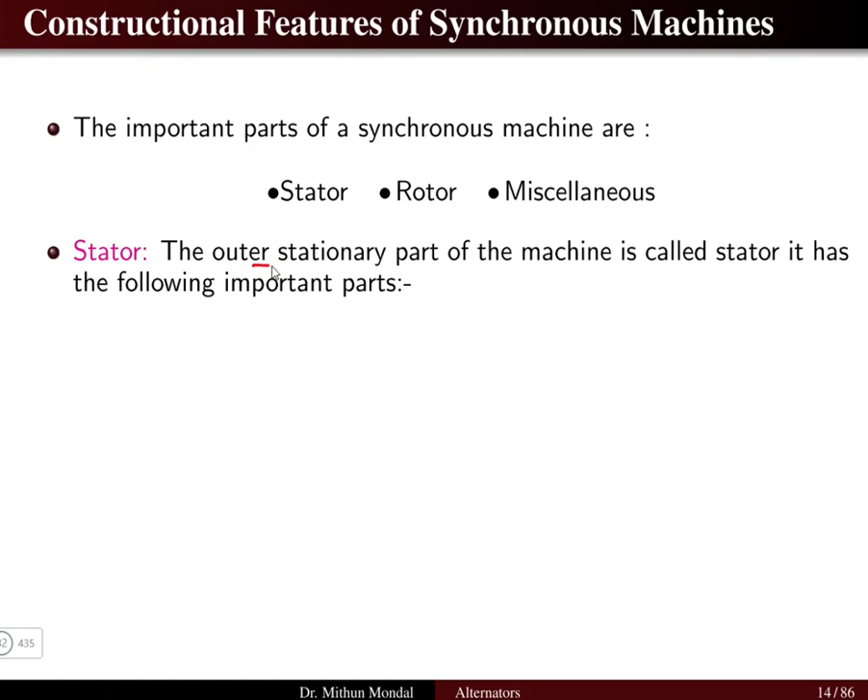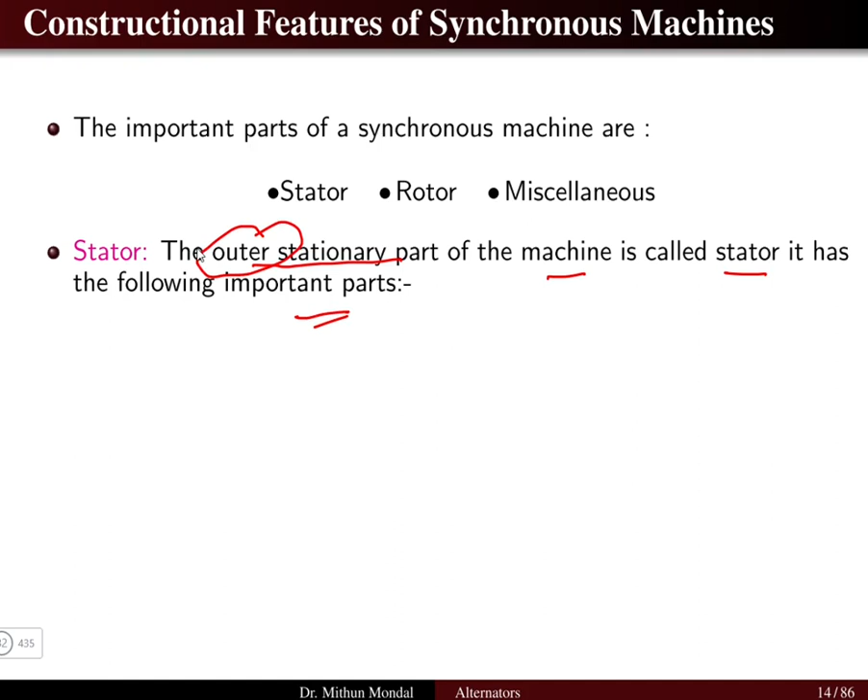What is a stator? Stator is basically the outer stationary part of the machine, and has the following important parts. It is the outer part of the machine. The stator has a frame, which is the outer body of the machine, made up of cast iron. The stator frame protects the inner part of the machine. It can also be made of any other strong material since it does not carry the magnetic field.

The stator frame is generally to protect the machine. So it has to be made from a strong material. It does not have to carry any magnetic field. Cast iron is used only because of its high mechanical strength. Since cast iron has more mechanical strength, the frame is made up of cast iron.

The second part is the stator core, which is made up of silicon steel, in the form of stampings which are insulated from each other. Its function is to provide an easy path for the magnetic lines of force and to accommodate the stator winding. The stator core is where the flux is produced. It is generally made of silicon steel stampings, properly insulated from each other. It provides an easy path for the flux and also carries the stator winding.

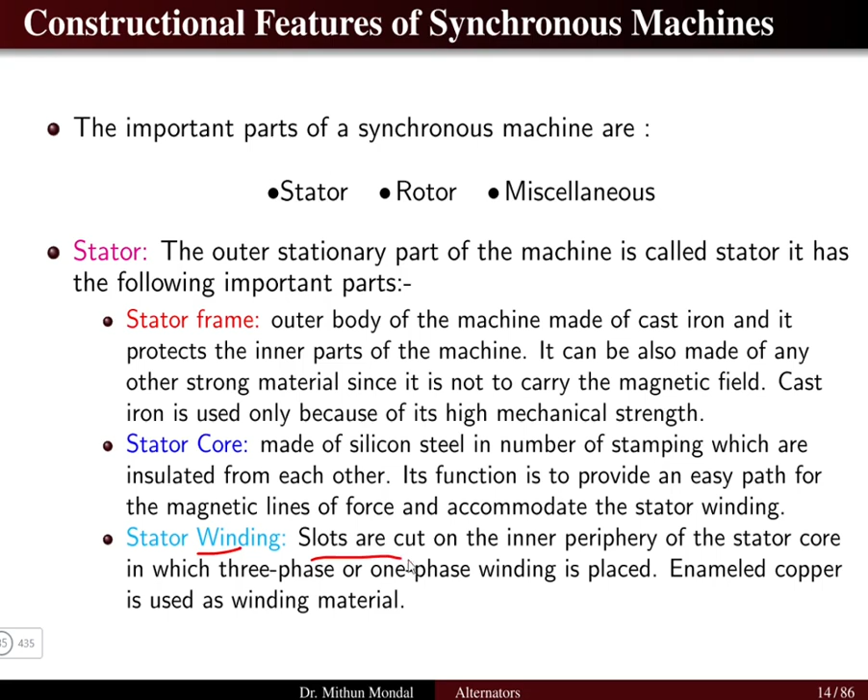The third important part of the stator is the stator winding. Basically, slots on the inner periphery of the stator core contain the three-phase or single-phase winding. Depending on this, we can form a three-phase synchronous machine or a single-phase synchronous machine. Enameled copper is used as the winding material, since copper is a good conductor of electricity. So we have covered the stator, which is the outermost periphery of the synchronous machine, having the frame, the core, and the winding as its important parts.

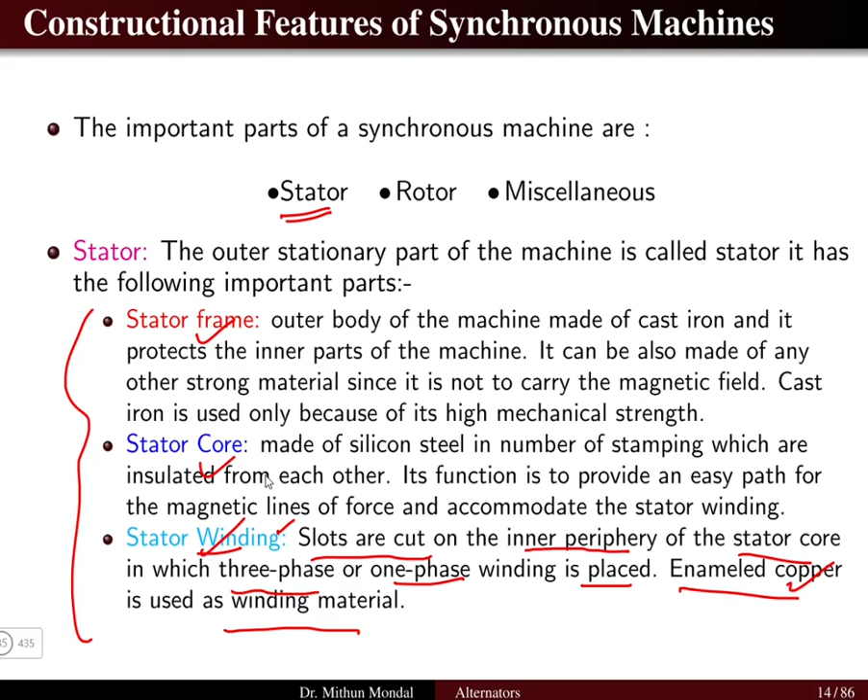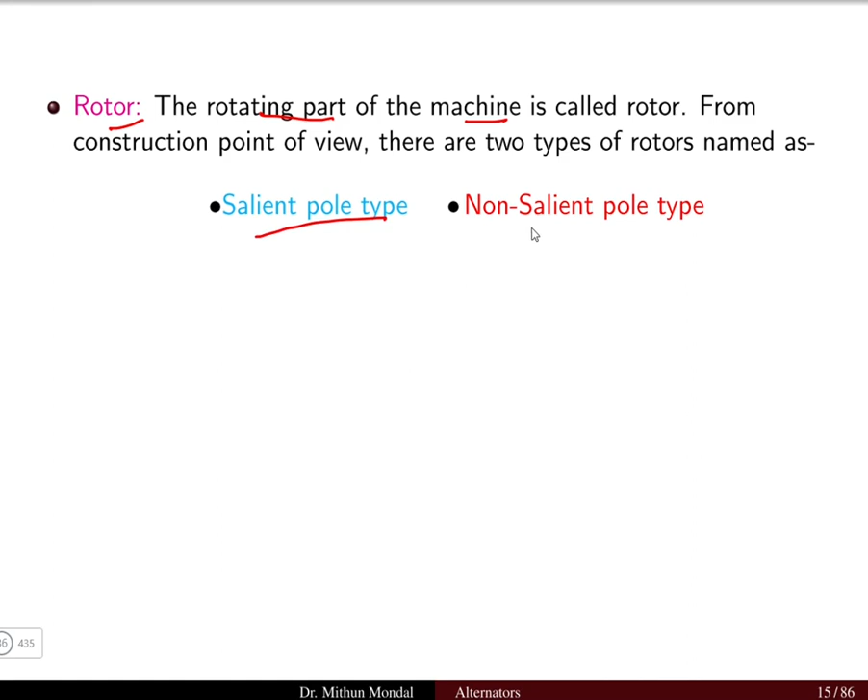The rotor is basically the rotating part of the machine. The stator is the stationary part and the rotor is the rotating part. The rotor can be of two different types: the salient pole type and the non-salient pole type. Salient pole means the pole which is projecting out. We will see the fundamentals of the salient pole type.

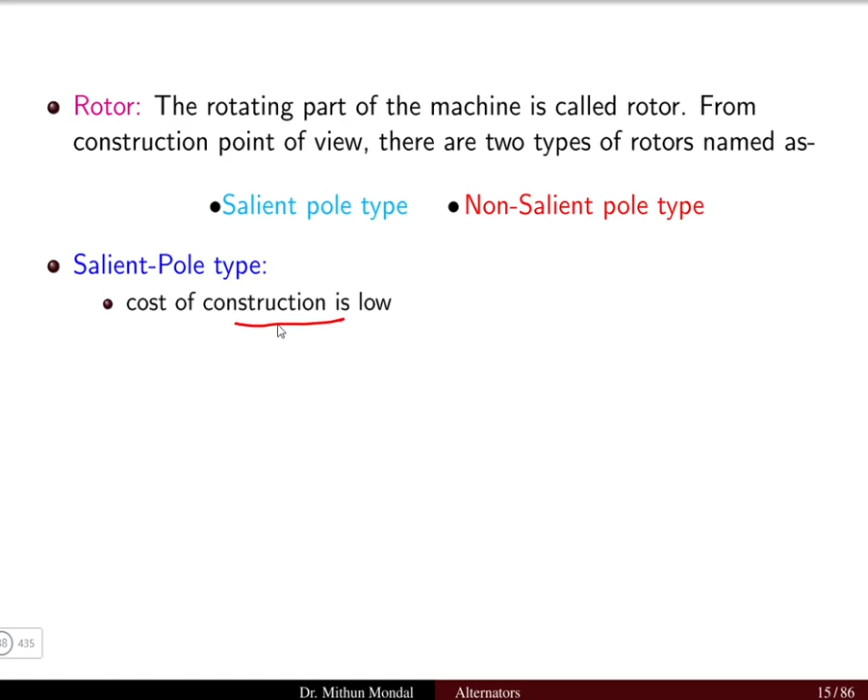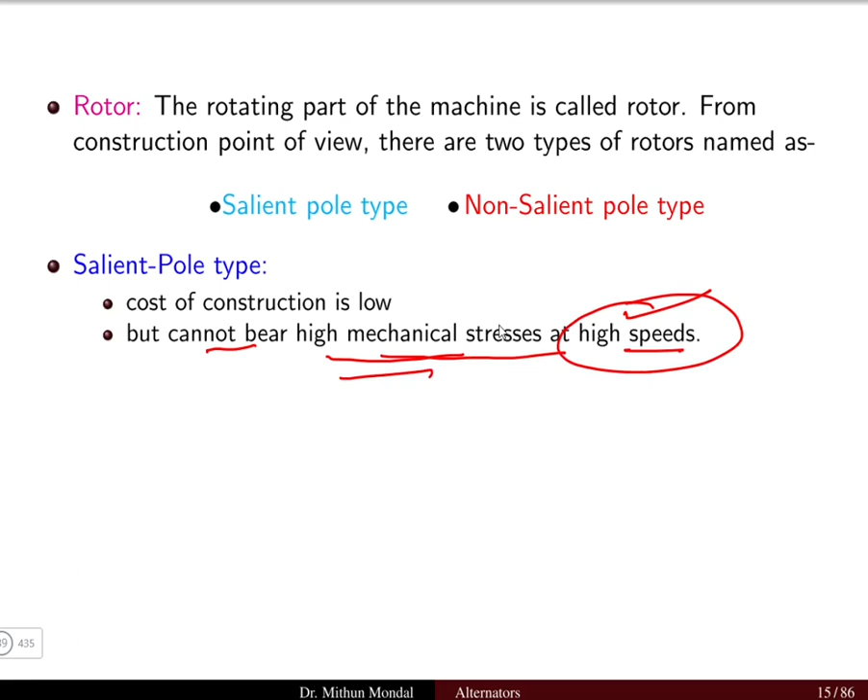Its construction cost is low, so the cost involved in constructing a salient pole type machine is low, but it cannot bear high mechanical stress at high speed. So when the synchronous machine is running at high speed, it will not be able to bear the high mechanical stress. That is the reason at high speed we go for the non-salient pole type.

Therefore the salient pole type is suited for medium and low speed and is usually employed at hydroelectric power stations and diesel power plants. When the synchronous machine has to run at medium or low speed, we prefer the salient pole type, and when it has to run at high speed, we go for the non-salient pole type, generally used in hydroelectric power plants and diesel power plants to produce electricity.

Now the important parts of the salient pole rotor are the spider, the pole core and pole shoe, the field winding or excitation winding, and the damper winding.

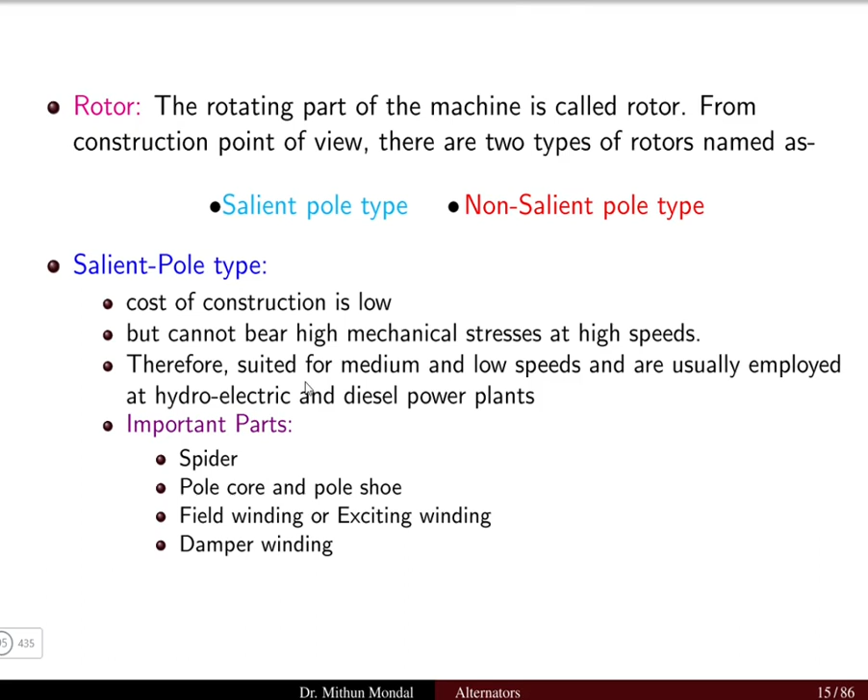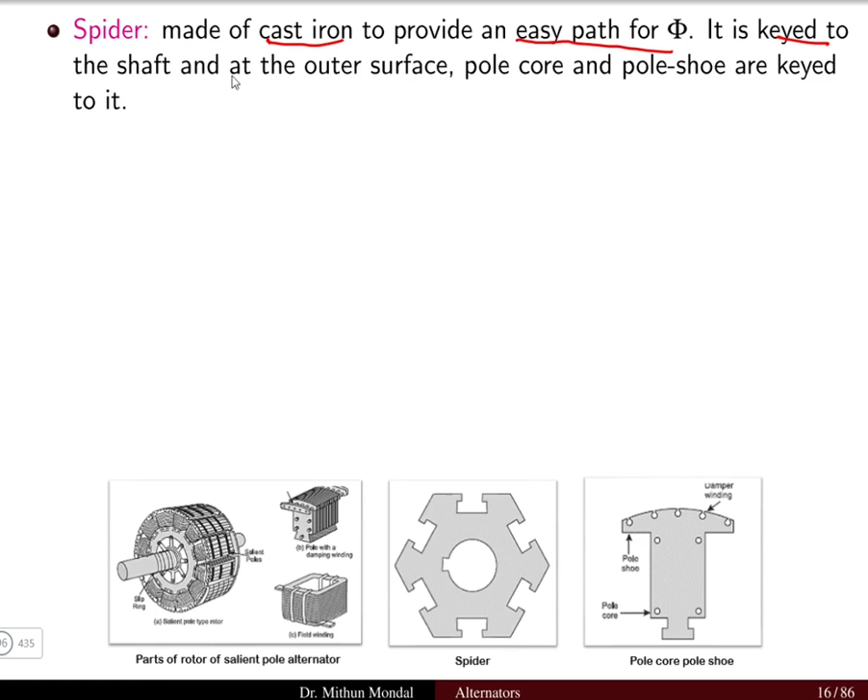What is a spider? The spider is made up of cast iron and provides an easy path for the flux. It is keyed to the shaft of the machine at the outer surface, and the pole core and pole shoe are keyed to it. Now, the pole core and pole shoe: the pole core provides the least reluctance path.

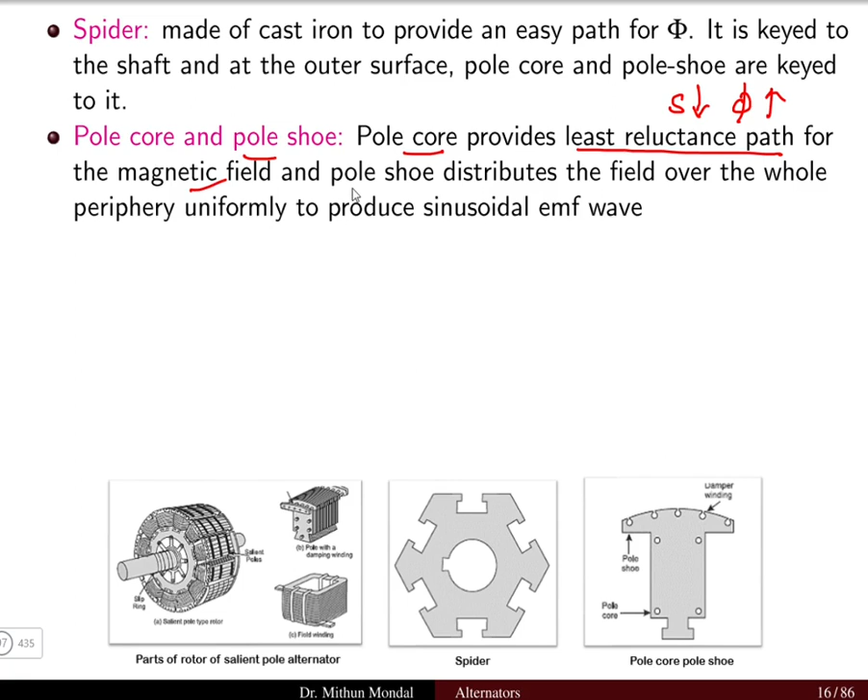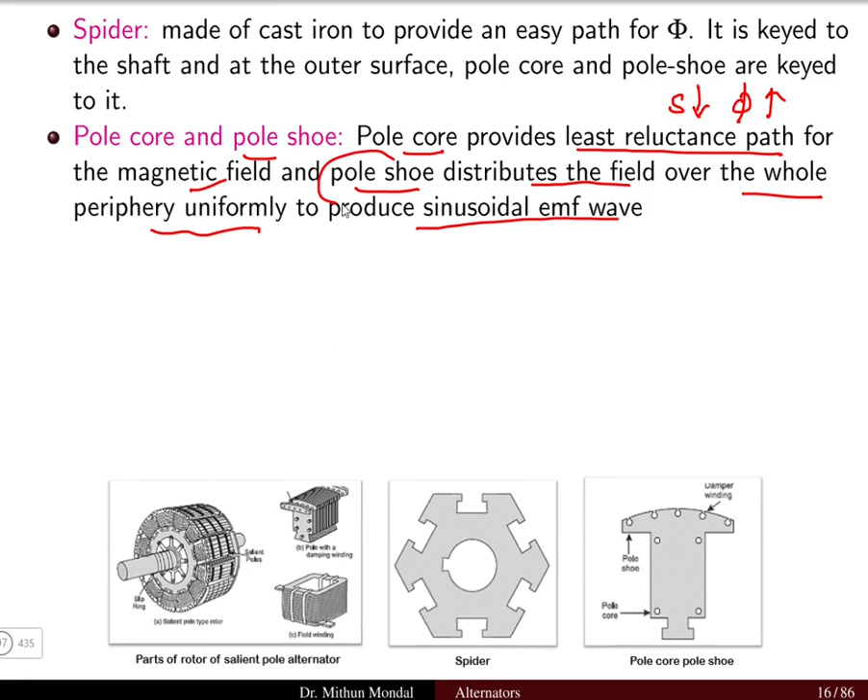If the reluctance is lower, it will be easy to establish the flux in the core of the transformer, the core of the magnetic path, that is the magnetic field. The pole shoe distributes the field over the whole periphery uniformly to produce a sinusoidal EMF wave. So the pole shoe is trying to produce a sinusoidal EMF wave.

The field winding or the excitation winding is wound on the former, which is the core, and then placed around the pole core. DC supply is given to it. So the excitation winding, which is the field winding, we will be giving a DC supply, which we have discussed in the previous lecture also. It will be around 125 to 600 volt DC supply, and this will be given through slip rings.

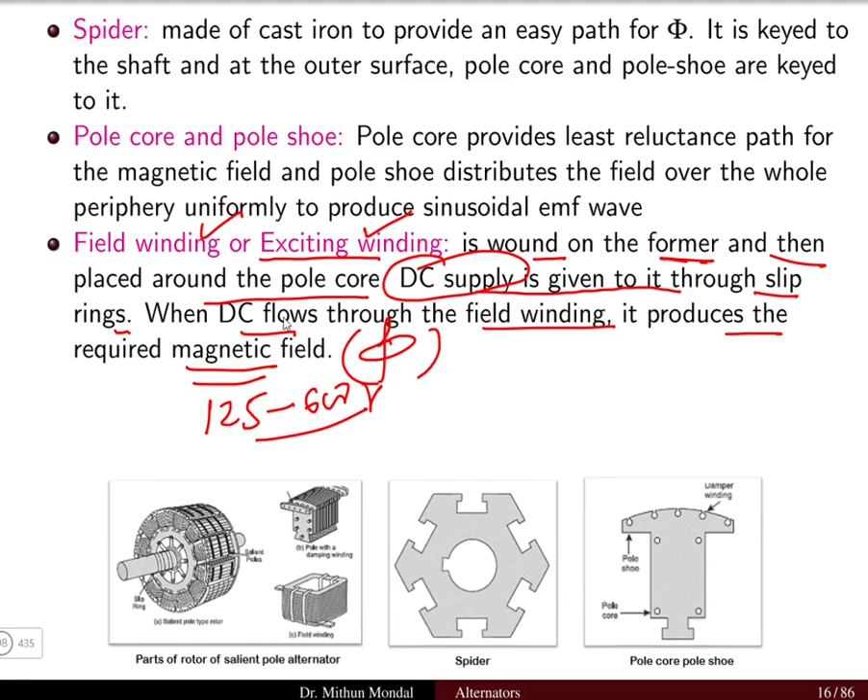So when DC flows through the field winding, it produces the required magnetic field. So we require to produce a flux in the field, that is through the field winding when a DC supply is passed through it.

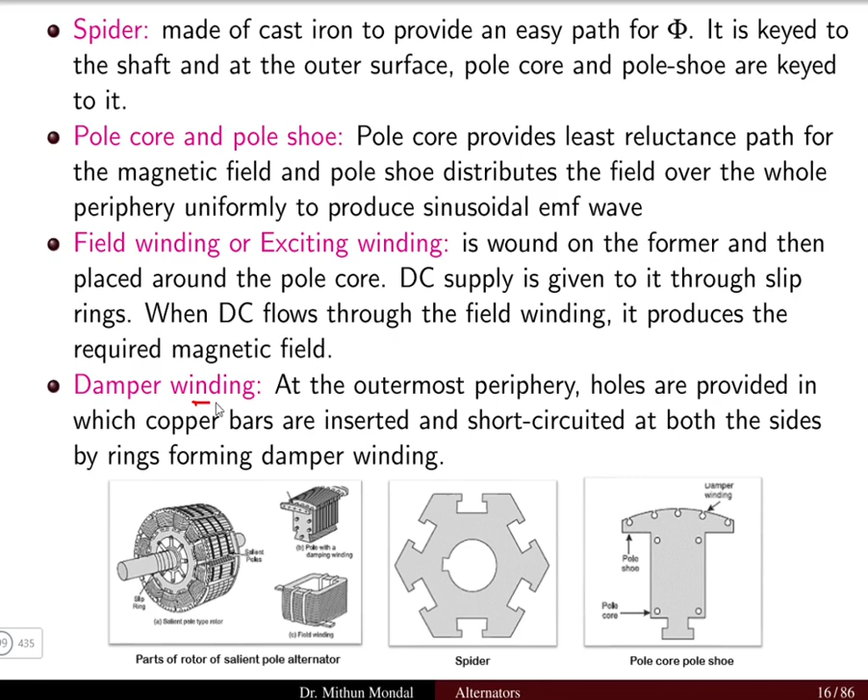Now, one important part of the rotor is basically the damper winding, which is at the outermost periphery, and holes are provided in which copper bars are inserted and short circuited at both the sides by a ring forming a damper winding. We will discuss damper winding in more detail in the coming lecture. So here, generally to understand the damper winding, we see in the pole shoe there will be holes produced, and these are basically copper bars that are inserted and short circuited. They form a ring which is known as the damper winding.

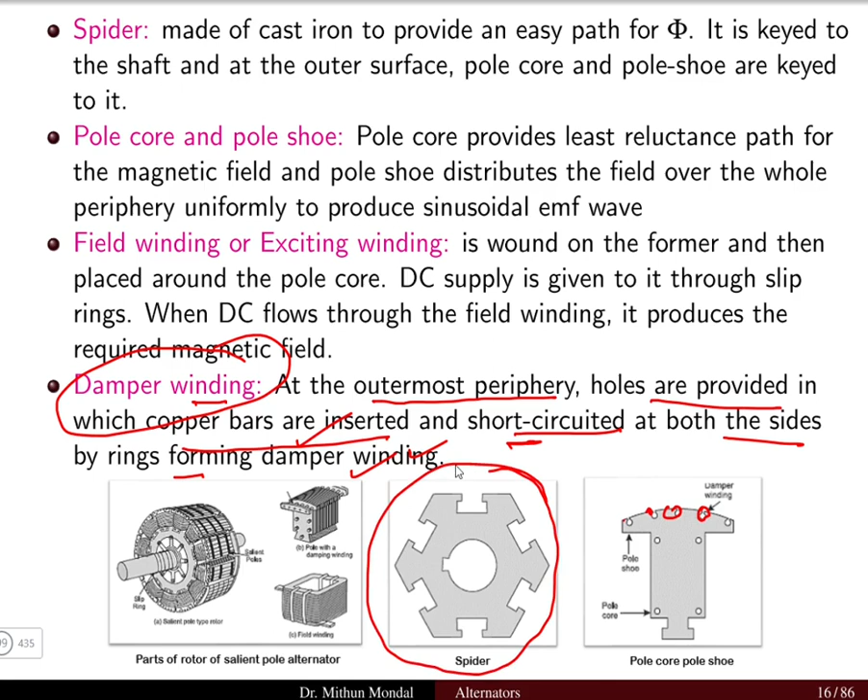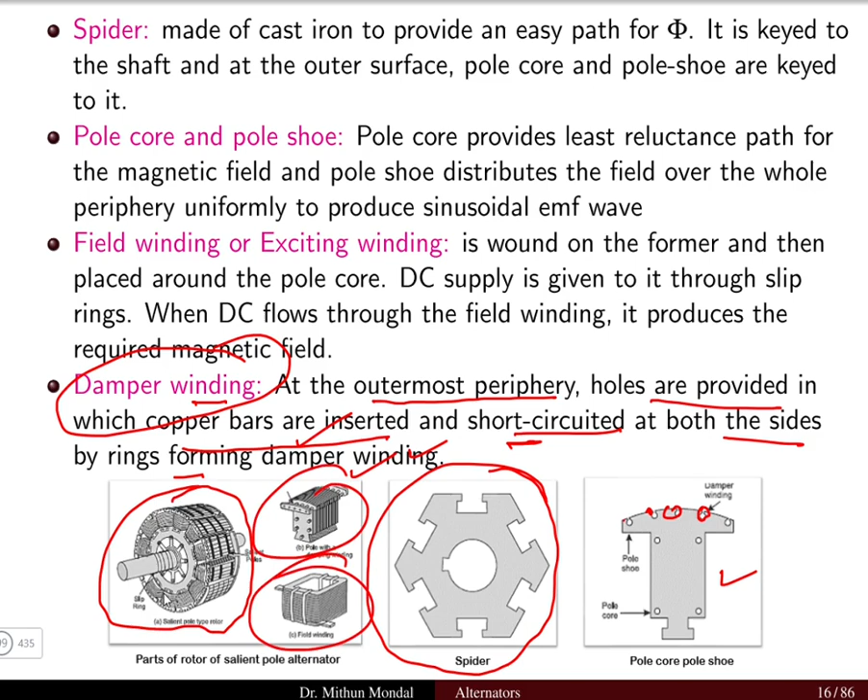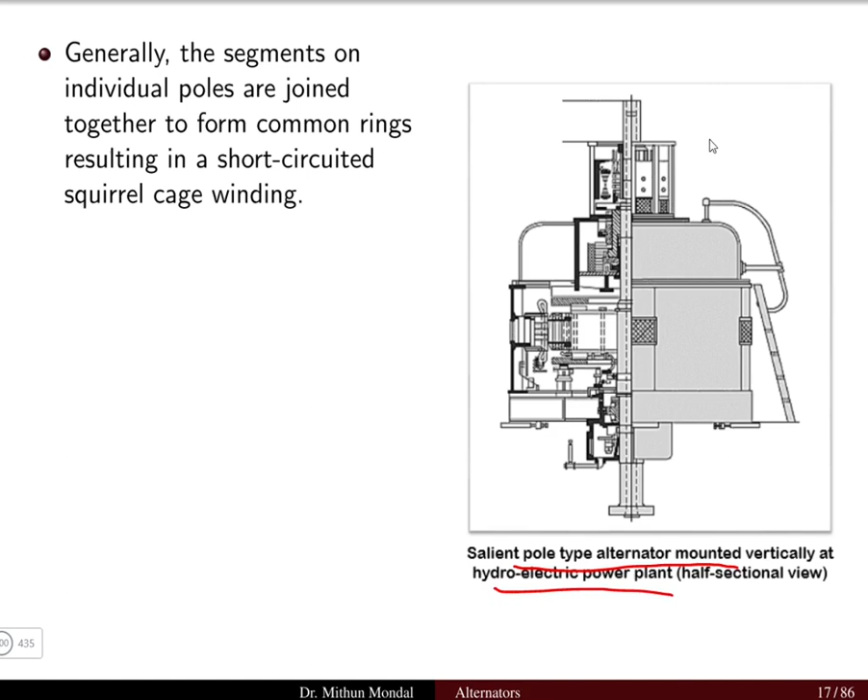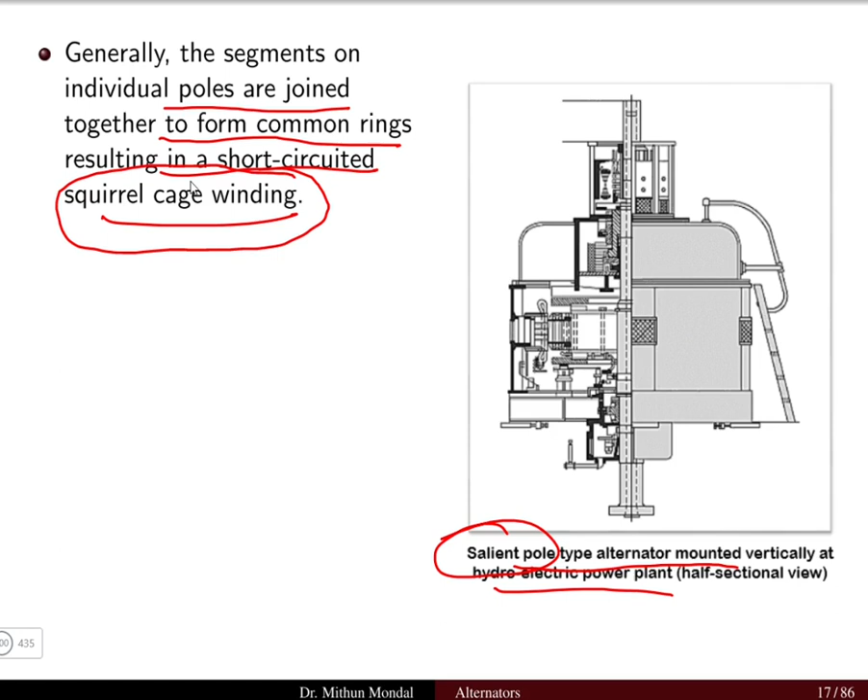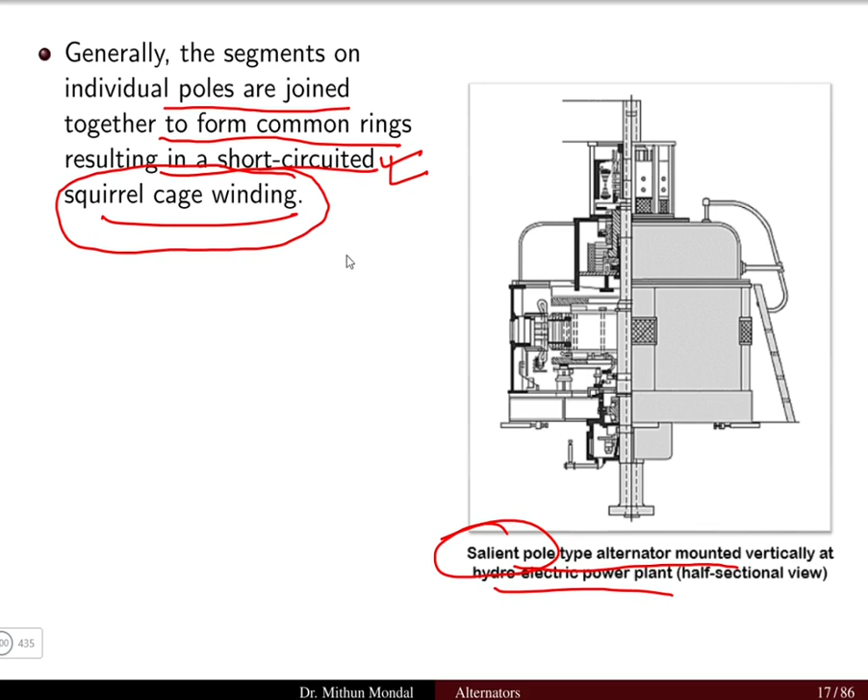So in the hydroelectric power plant, how the salient pole type machines are there. Generally the segments on the individual poles are joined together to form a common ring, resulting in a short circuited squirrel cage winding. So when we have discussed the induction motor, we have discussed that the rotor of the induction motor is basically squirrel cage type, and here the rotors are short circuited at the end ring. So on the similar nature, the salient pole rotor of the synchronous machines are also in the form of squirrel cage winding.

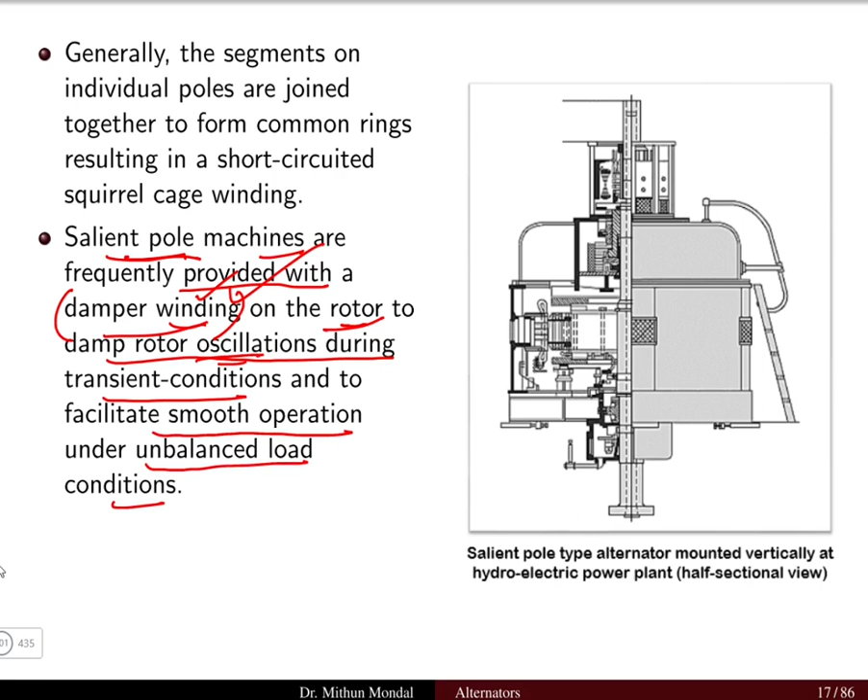So salient pole machines are frequently provided with a damper winding on the rotor. These damper windings are mainly used to damp the rotor oscillation during transient condition. So whenever there is some fluctuation in the voltage or the current, some type of transient phenomena occurs, and these damper windings will damp out the rotor oscillations, and it will facilitate a smooth operation under unbalanced load conditions.

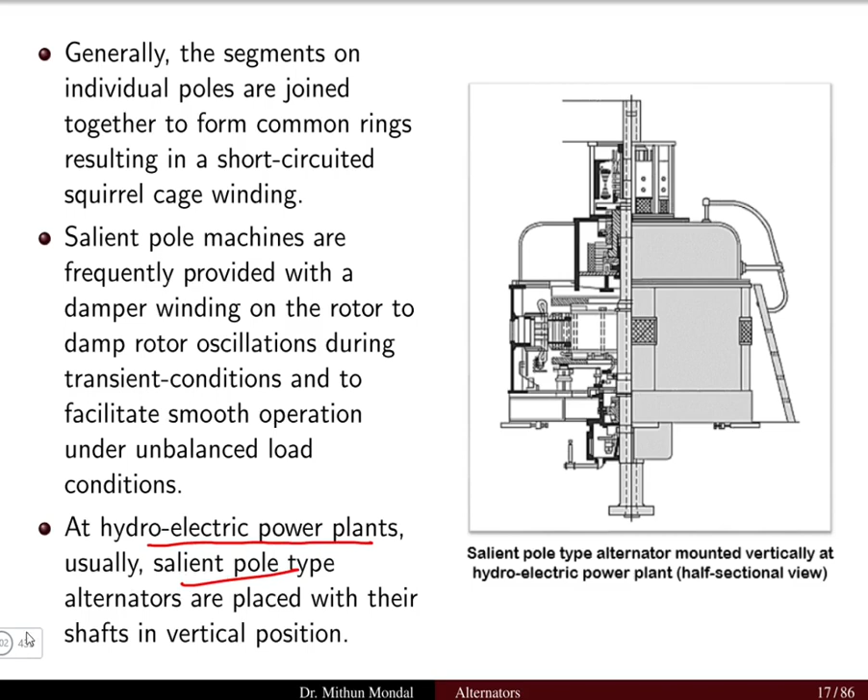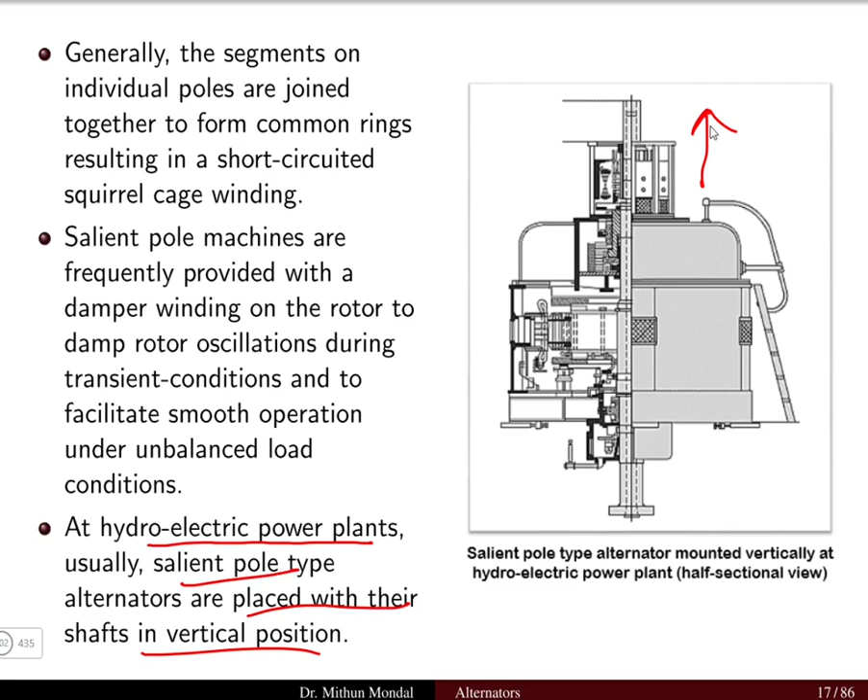Now hydroelectric power plants will generally use the salient pole type because the speed will be under the low or the medium speed range, are placed with their shaft in the vertical position. So here we can see the shaft is in the vertical position. Generally in hydroelectric power plants where the salient pole rotor are used, the rotor is placed in the vertical position. Now we have seen the salient pole.

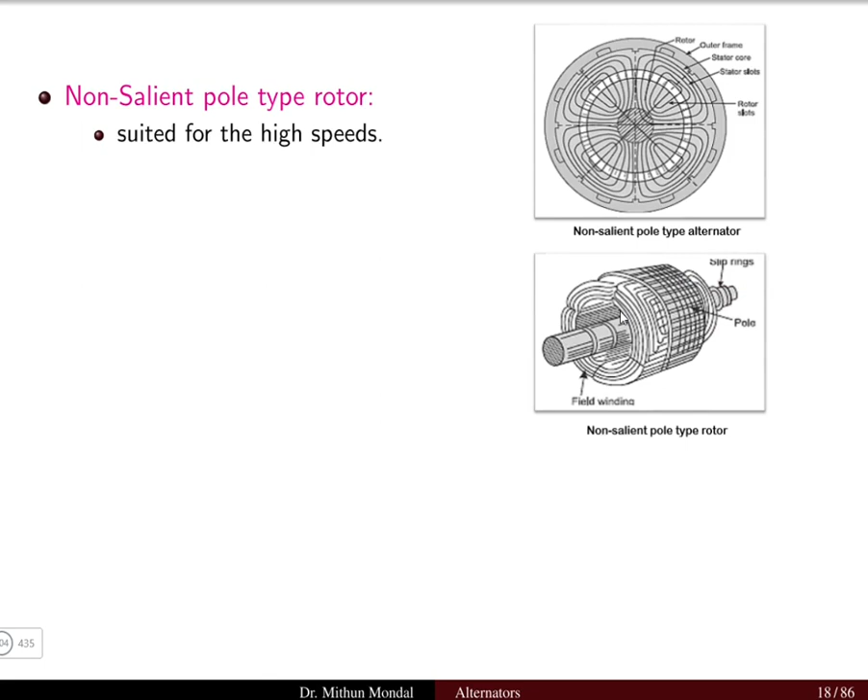So let us see the non-salient pole type of rotor. These are basically the non-projecting type rotor. So here in this figure we have been shown the non-salient pole type rotor, and this is the actual rotor of the non-salient pole, which is given with the help of slip rings, and the pole and field winding are shown.

So it is suited for high speed. Wherever high speed is required for the alternator, we will go for the non-salient pole type rotor. Generally the steam turbines rotate at a high speed, that is 3000 rpm. So there the salient type of rotor we will not use, and non-salient type of rotor we are going to use.

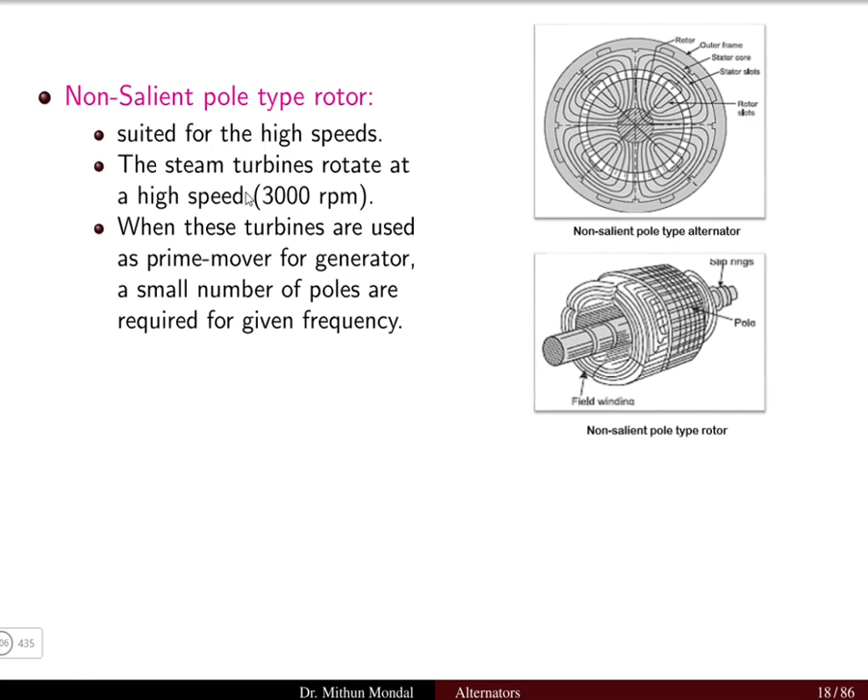When these turbines are used as prime mover for a generator, a small number of poles are required for a given frequency, since poles and frequency are related. Because it has to run at a very high speed, for a small number of poles, these types of turbines are generally used as the prime mover for the generator.

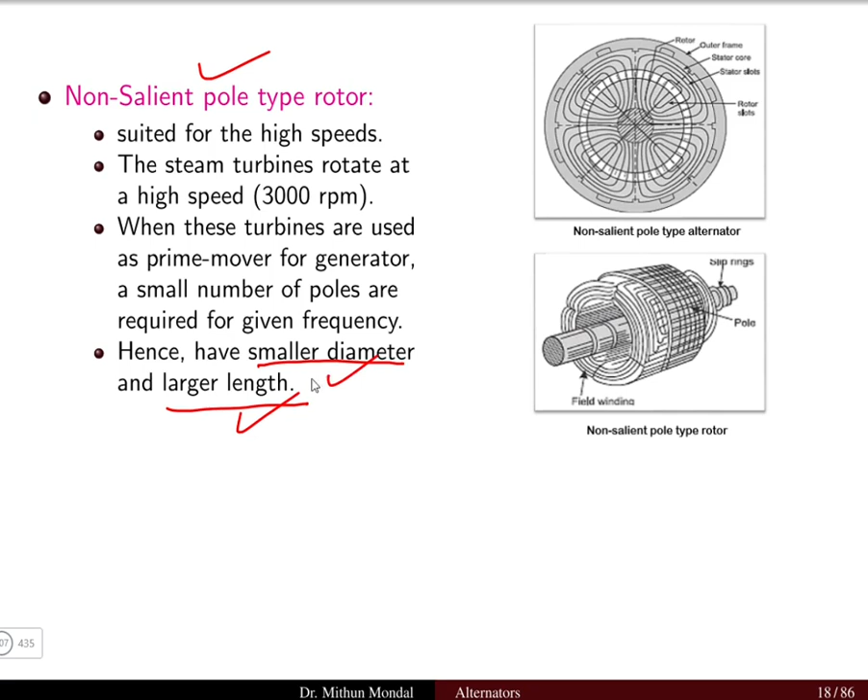So it has a smaller diameter and larger length. The non-salient pole type rotor will have the diameter smaller and a large axial length.

Now, non-salient pole type rotors have the following parts. First, we have the rotor core, which is made up of silicon steel stamping. It is keyed to the shaft and provides an easy path to the magnetic flux. This is the basic function of any type of core, and silicon steel is the better material for it.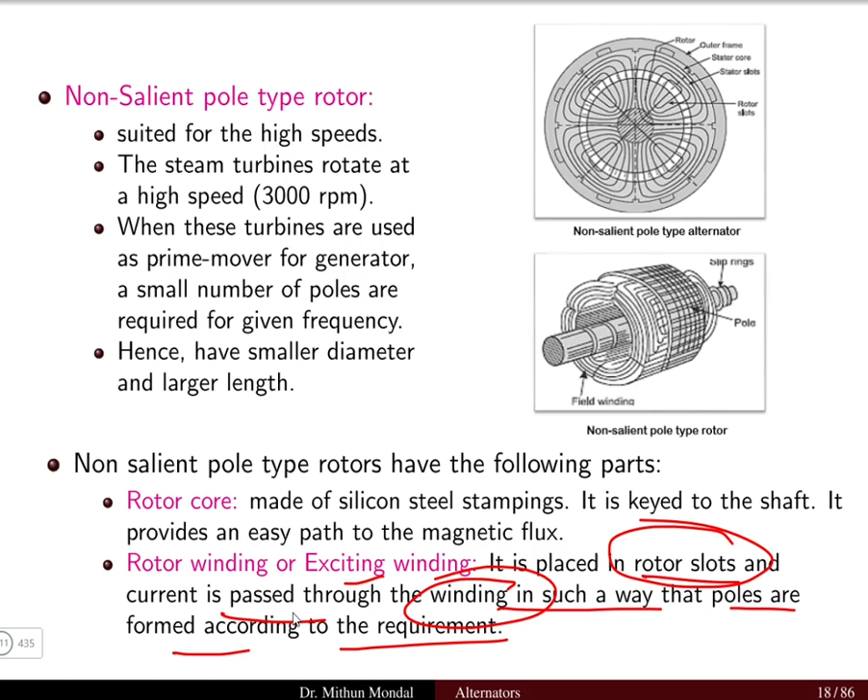Then there's the rotor winding or exciting winding, which is placed in the rotor slots, and current is passed through the winding in such a way that poles are formed according to the requirement.

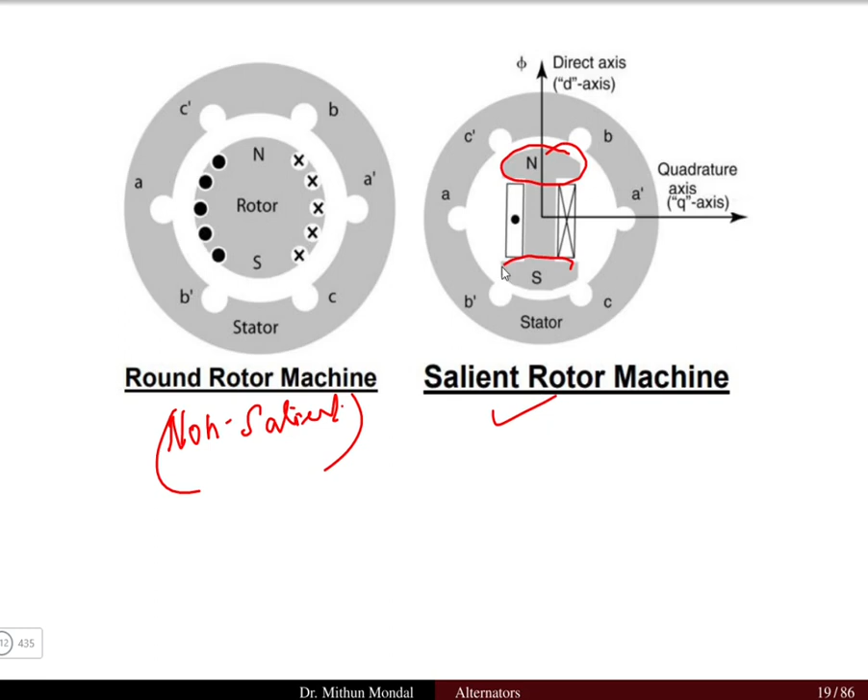Now here in this figure we can see the non-salient pole, also known as a round rotor machine. So this is the non-salient type, and here you have the salient rotor. In the salient rotor we can see how the poles are projected out, whereas in the round rotor, the poles will not be projected out—it will be in the form of a round rotor. That is why it is called non-salient pole.

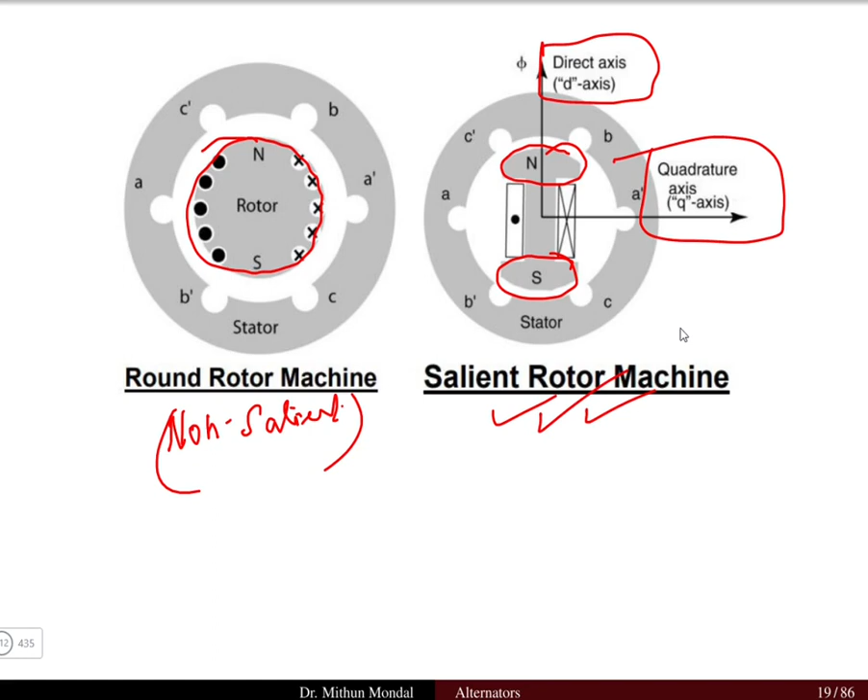In the salient pole rotor, the field will not be uniform—you will have one field which is the direct axis and another field in the form of the quadrature axis. When we study the salient pole in detail, we will see what is a direct axis and what is a quadrature axis of the field.

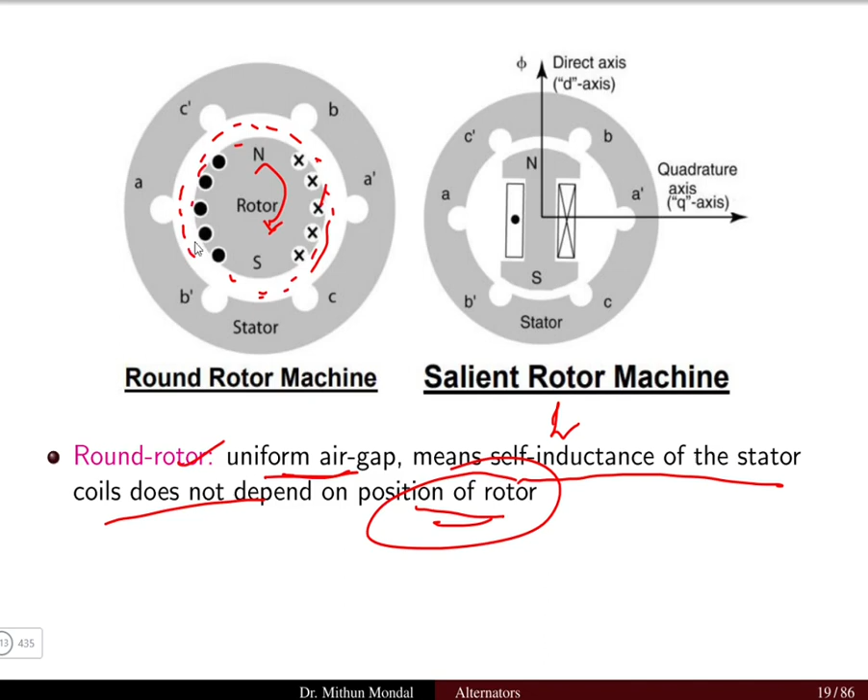Now, if we compare the round rotor machine with the salient rotor machine, we see that in a round rotor machine there is a uniform air gap—if you see the air gap here, it is uniform because the rotor is round. This means the self-inductance of the stator coil does not depend on the position of the rotor. So whenever we try to find the inductance of the coil, it will not depend on the position of the rotor as it rotates, since the air gap is uniform, making the self-inductance uniform.

Whereas in the salient pole type, there is a varying air gap. Here we have the north pole and south pole projecting out, so when this rotor rotates, it is cutting the flux in the air gap. This varying air gap results in stator self-inductance which is time varying. So in the round rotor, self-inductance does not depend on rotor position, whereas in the salient pole machine, the self-inductance is time varying, giving it D axis and Q axis reactance.

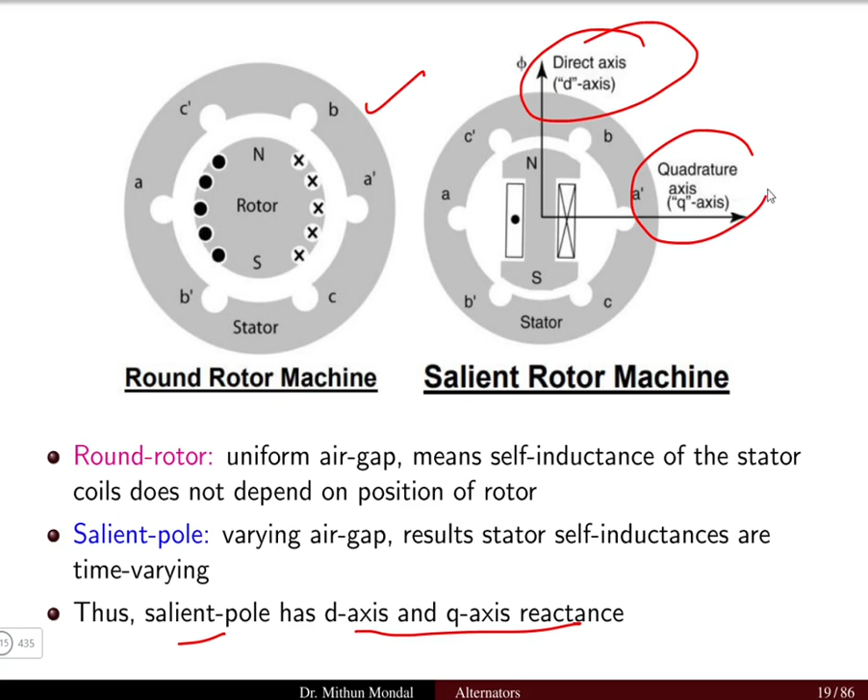So the reactance of the round rotor machine is constant, whereas in the salient pole machine, the reactance on the direct axis and the quadrature axis will differ.

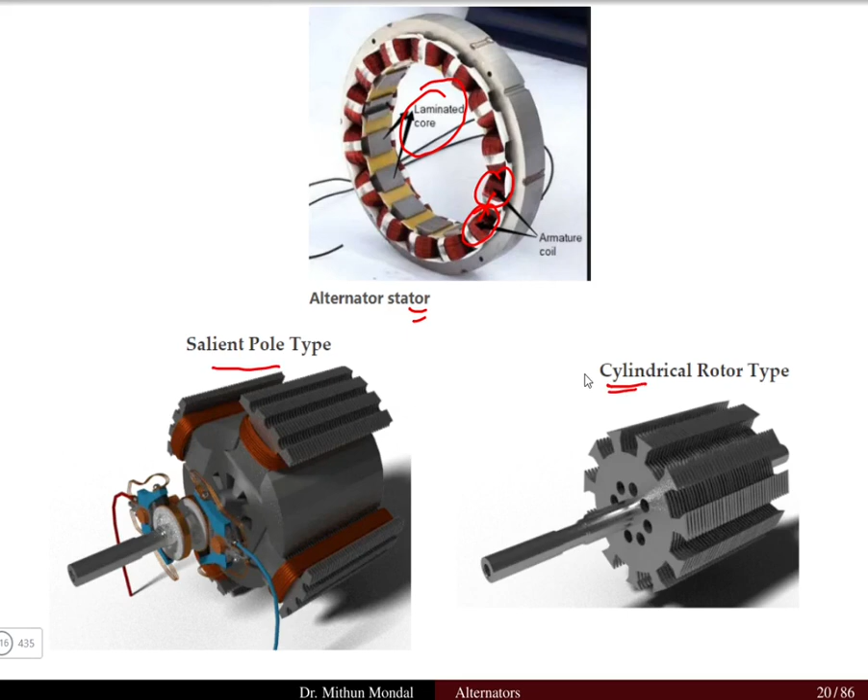The rotor can be a salient pole type or cylindrical rotor, which is the round rotor type. Salient pole type rotor will have the projecting out rotor—these are the projecting out poles—while the cylindrical rotor type will have a round rotor.

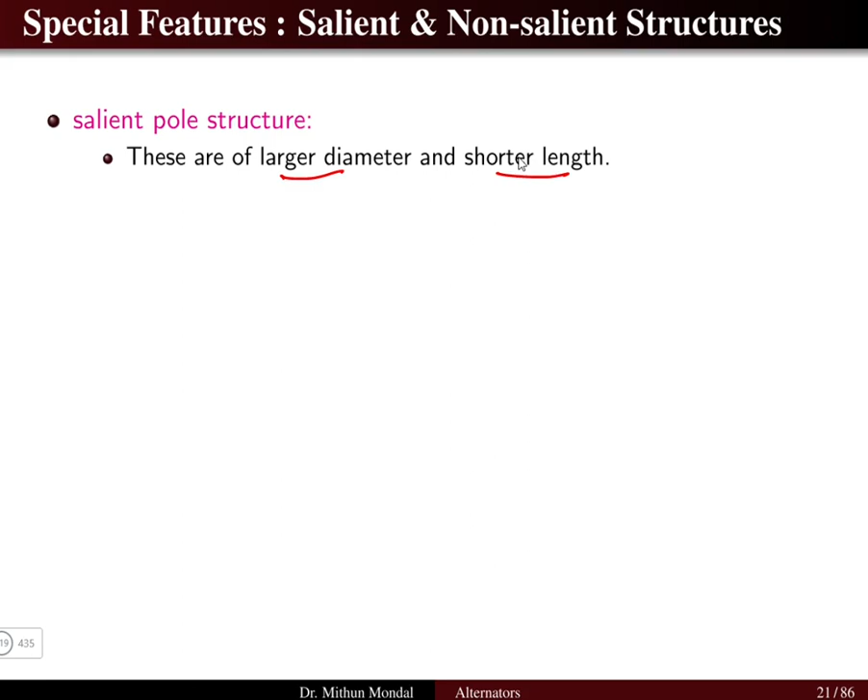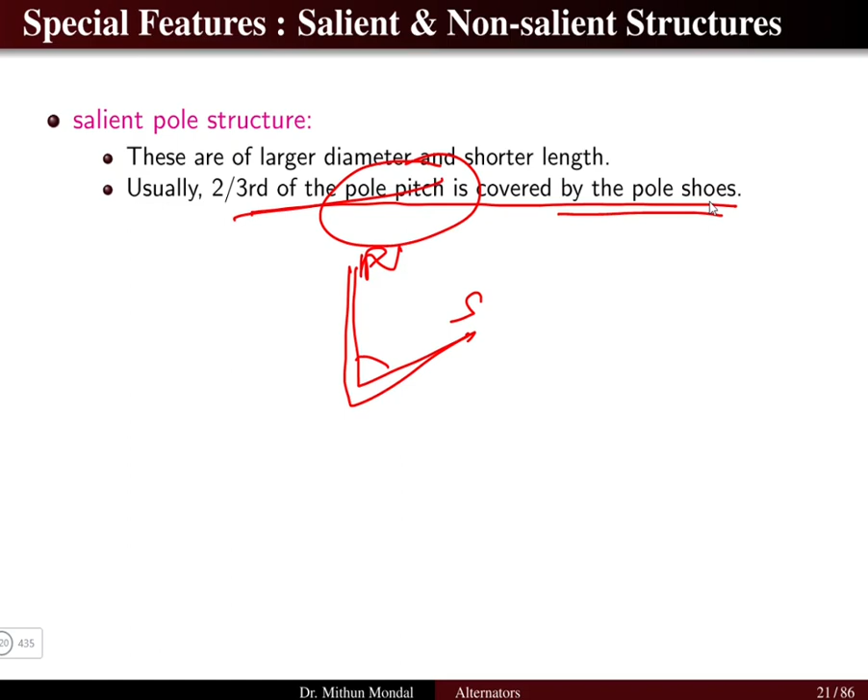So diameter will be large and length will be shorter. Usually 2/3 of the pole pitch is covered by the pole shoe. Pole pitch is basically the adjacent distance between the poles. So if you have a north pole here and a south pole here, this distance is known as the pole pitch. So 2/3 of the pole pitch is covered by the pole shoe, and to reduce eddy current losses, the poles are laminated in the salient pole structure.

This is generally employed where low speed machines, like 100 to 375 RPM, are employed in hydraulic turbines, wind, or diesel engines.

Non-salient structures, on the other hand, generally have smaller diameter and very long axial length. So if you compare the salient pole structure with the non-salient pole structure, salient pole will have larger diameter and shorter length, whereas non-salient structure will have smaller diameter and very long axial length.

It will have a robust construction and noiseless operation because the rotor is non-salient type. So air resistance loss, that is windage loss, will be lesser in non-salient structure.

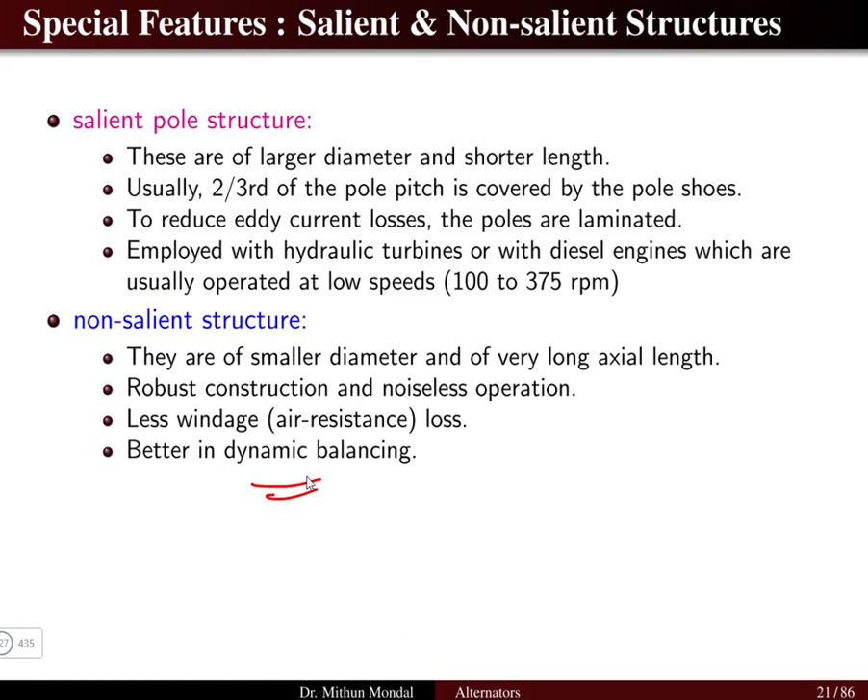It will have better dynamic balancing because the rotor is round and the air gap is uniform. The losses are less and dynamic balancing is there. It is suited for high operating speeds around 3000 rpm.

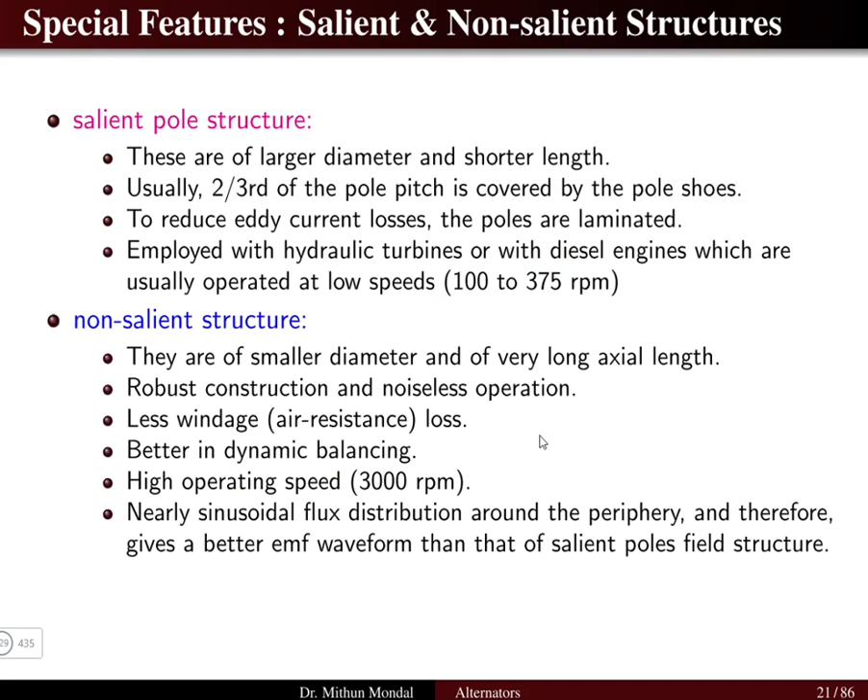So salient pole is suited for 100 to 375 rpm, whereas non-salient structure is suitable for high operating speed, that is 3000 rpm. In non-salient structure, nearly sinusoidal flux distribution around the periphery is produced, giving a better EMF waveform than salient pole structure. Because in salient pole structure, the poles are projecting out and the air gap is not uniform, it will not give a sinusoidal flux distribution, but here you get a better EMF waveform.

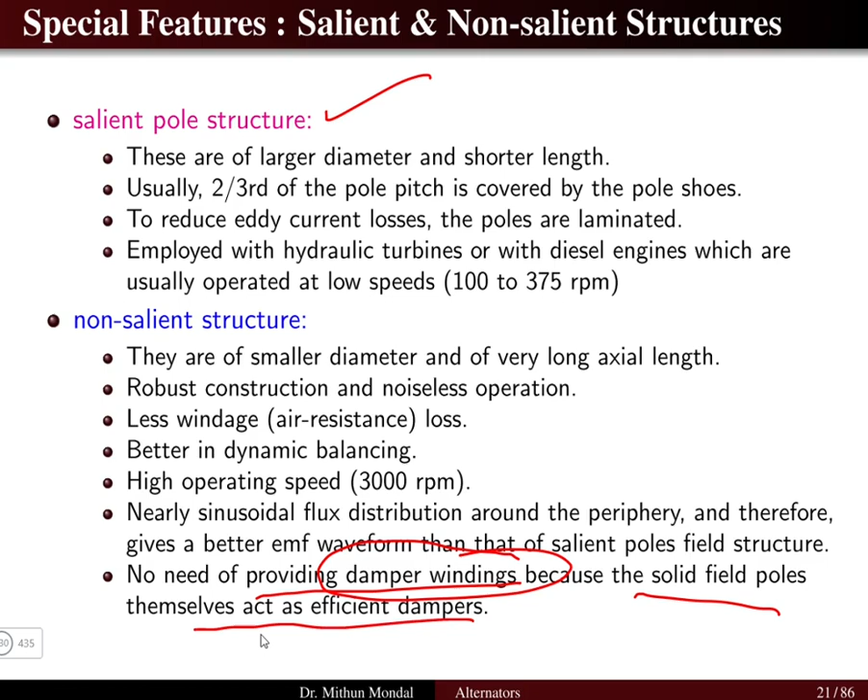There is no need to provide a damper winding in non-salient structures. Damper windings are generally used in salient pole structures but here the solid field poles themselves act as efficient dampers, so we don't require a damper winding for the non-salient structure.

Now some of the miscellaneous parts are basically the brushes. We have seen the stator and the rotor. The miscellaneous parts include brushes, which are made up of carbon and slip over the slip rings. DC supply is given to the brushes, and from the brushes current flows to the slip ring and then to the excitation winding.

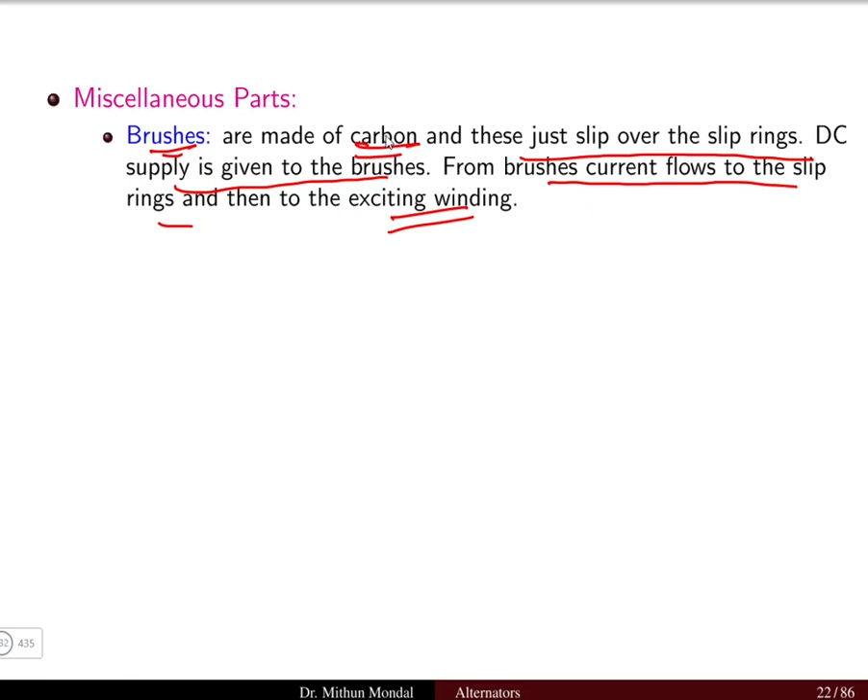Generally brushes are present on the rotating part, so they wear out because they are made of carbon and there is continuous rubbing over the slip rings. The bearings are provided between the shaft and the outer stationary body to reduce friction. Bearings are another miscellaneous part of the machine.

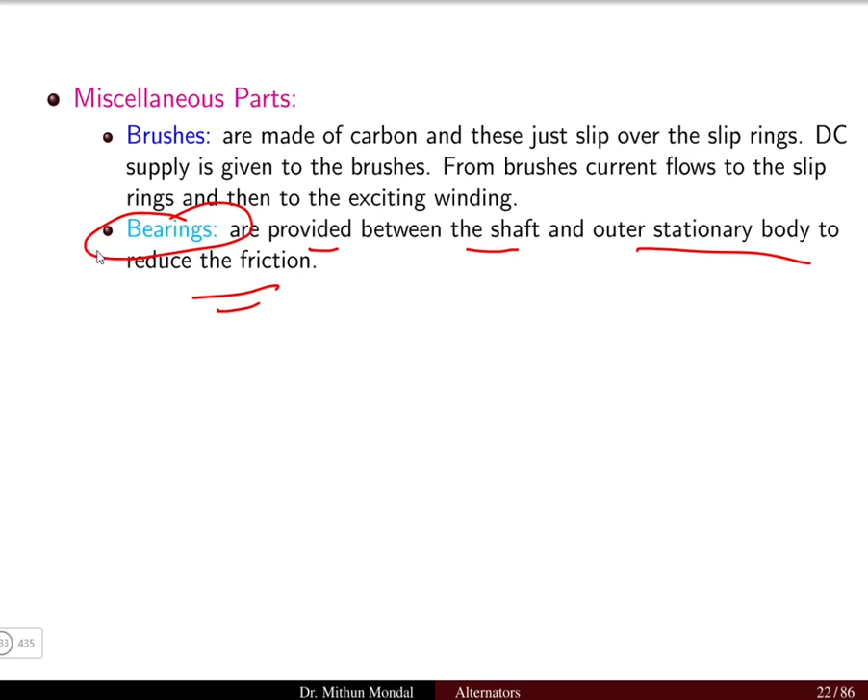Shaft is made up of mild steel. Mechanical power is taken from or given to the machine through the shaft. So the shaft is where energy is input or output from the machine, whether it is a generator or a motor.

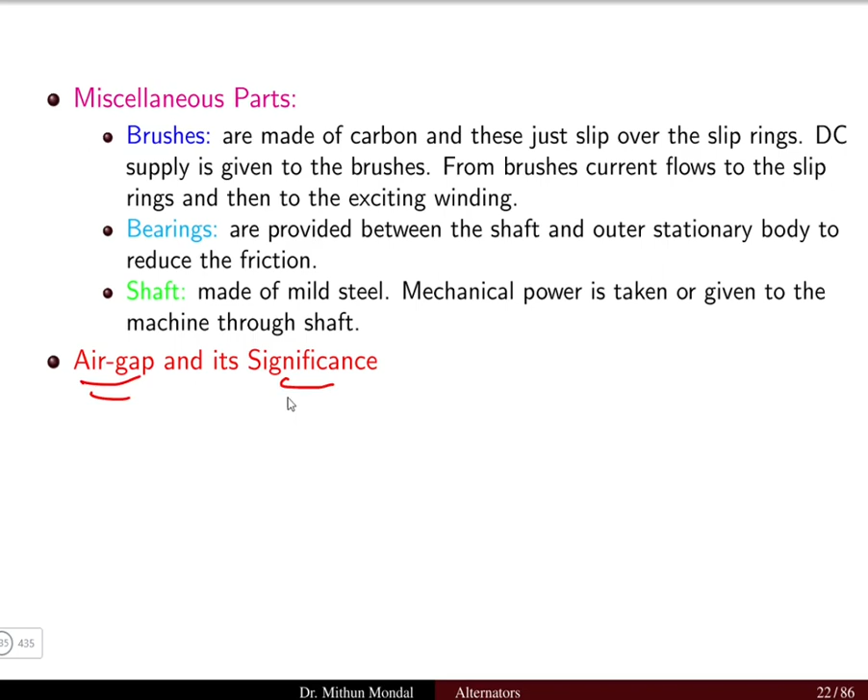There is some air gap between the stator and rotor, and it has significance. What is the significance of that? A very small air gap increases the stray load losses and synchronous reactance. So if you have a small air gap, it will increase the load losses, that is the stray losses, and will produce more synchronous reactance.

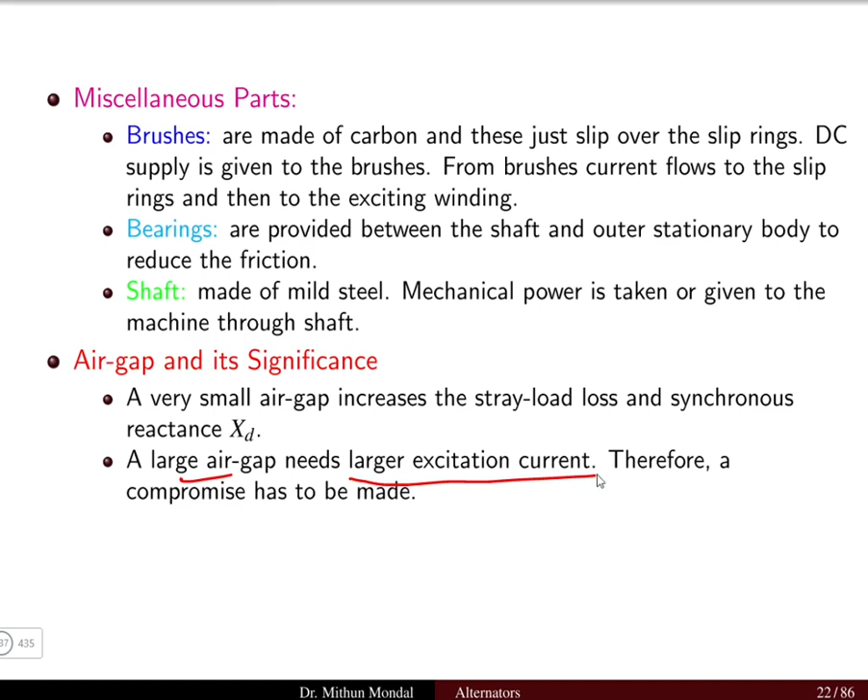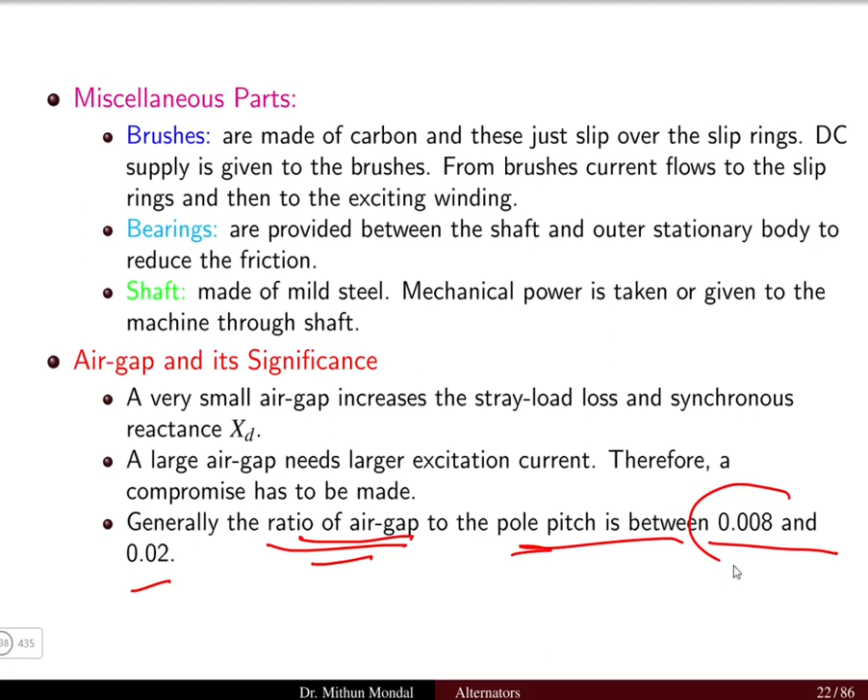If you have a large air gap, it needs large excitation current, so the current requirement is much more to produce the flux. Therefore, a compromise has to be made between a small air gap and a large air gap. Generally, the ratio of air gap to the pole pitch is kept between 0.008 and 0.02. So neither a very small nor a very large air gap is provided.

So this chapter gives a brief overview of the constructional details of the synchronous machine.